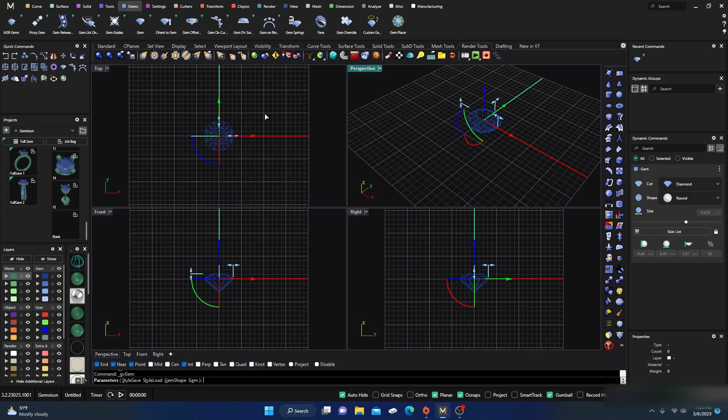So let's get started with this. First I'll go ahead and grab me a gem, and I'll just keep it at a 1 carat to make it easy for everything. Now what I'll do is take my gem and do my gem offset here, and I'll change it to yellow so I can see it a little bit better.

I'm just going to type in, I don't know, negative 0.03. Maybe that'll work. Negative 0.03 and enter. No, it's not going to do it. I wonder why. Okay, so I'll just drag it in. It says negative 0.3. There we go, negative 0.3, and I'll take that.

Right away I'll take that curve and drag it up to the top of my gemstone, so I know my prongs will go up around there. Okay, and I broke history. I should have - matter of fact, let's just go back so we don't break history. Let's take that curve. Since it's an offset, I should be able to go over here, and now I can move it up to wherever I want it, and I can keep my history, right? So we'll do that, and then - well, we're going to break it anyway.

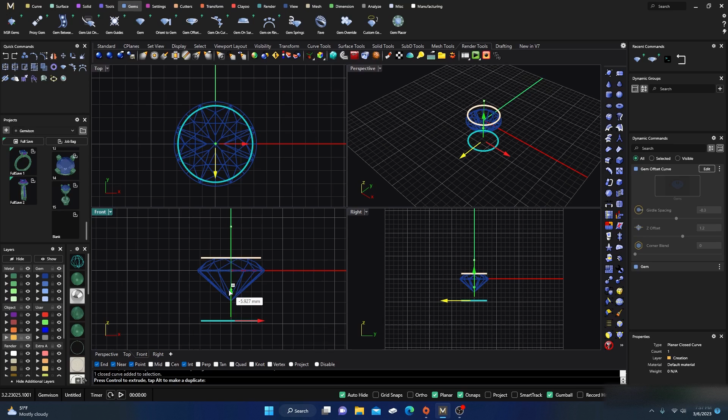So we'll go ahead and I'll hold down Alt, duplicate that, and drop it down kind of where I want the bottom of my head to be. Then I'm going to take that, hold down Shift, and bring it in a little bit so we don't want to see the prongs going around the outside there, or the head, right? We just want the prongs going in. So we'll take it something like that.

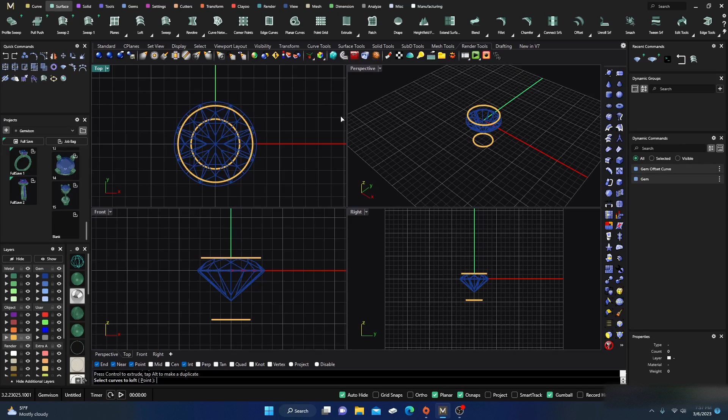And now we'll just do a loft real quick. This was a requested video, so hopefully it helps you. Then we'll hit enter, and we'll just take that surface there and turn that to a gray, and give it some shading. Okay, so there we go. There we have our head.

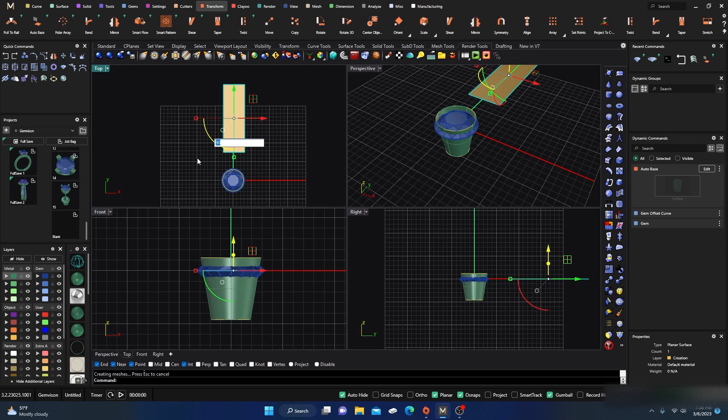Now let's go to transform, and we'll just do an auto base. And now everything's clicking, right? You know exactly what I'm going to do. So we'll go ahead and accept that. I'll take that and move it up around here somewhere, and then I will rotate that. Oh, it's already 90 - okay, 90 degrees. Change that to a little more friendly color. And then I'll just do my thing I like to do.

This time you probably should do it for reasons you'll see here in a second. We're going to dupe those edges and then hit enter, and then I'm just going to turn off that surface. Okay, and let's just get this to yellow.

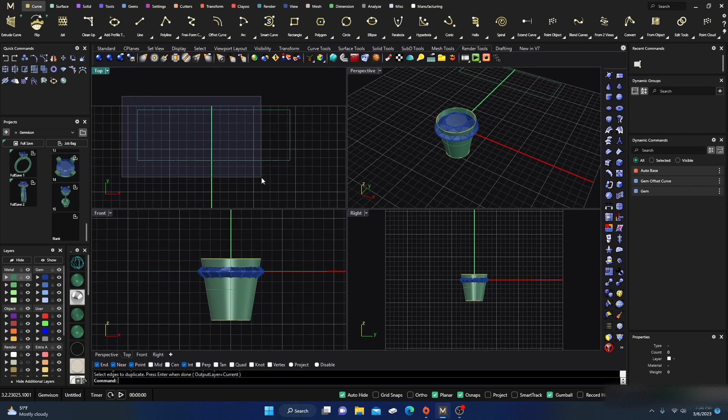Turn that to yellow, and we'll just change our layer to yellow. Actually, I'm going to change it to red because we're going to divide this curve. So I'm going to go up here and just type divide because I forget where it's at.

Divide curve by length of segments? No. Divide curve by number of segments? Yes, we'll take that. And 4 is what we want. So we'll go ahead and accept that and hit enter.

So there's my 4 prongs, right? This is half a prong. This is 1, 2, 3, and that's the other half, right? So now I'm going to take this curve and just hide it. I just want to see my dots out there.

Let's go ahead and go in here so we can get a good look, and we'll go to line curve, but I'll right click on it so I go to line both sides, and I will type in - now I'll turn it back to yellow. I'll type in, let's see, 0.5 will give me a 1 millimeter. We'll do 0.6 and hit enter.

So it'll be 1.2 in length. You can change that however you want it. I'll make sure my point snaps are on, and I'll go in here and click, okay, 0.6, enter, and that'll lock it in.

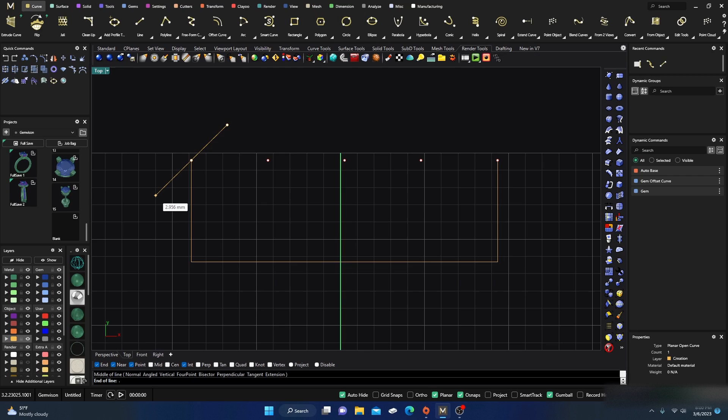So I'll just hold down shift and then click it, right? And then I'll take that and I will duplicate it from that center point there, there, there, and there. Okay, so now I have all my prongs. Those will be my prongs.

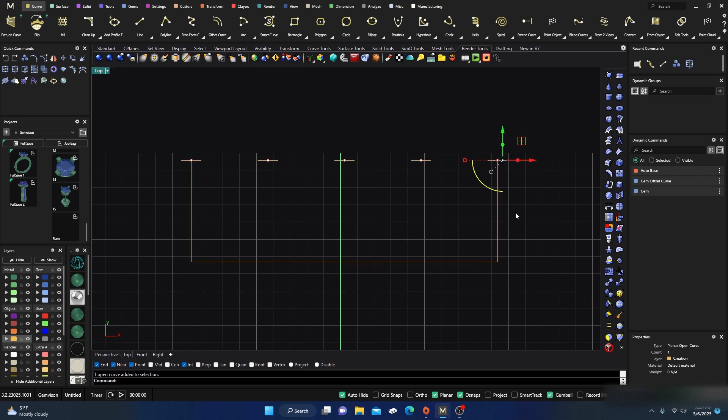So I'm going to take this one and split it with this line and hit enter, because we don't need this part here, right? Because we only need half a prong. So that's what we need right there.

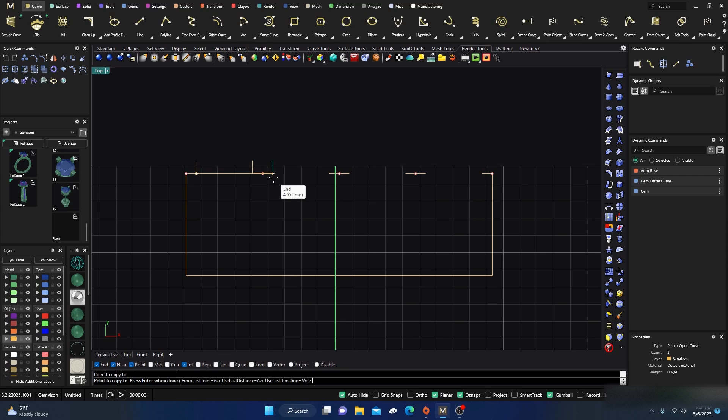Now what I'll do is go here and grab a line and snap to that end there, and kind of just hold down shift, draw it up, and then actually I'll just go ahead and take that and duplicate it from there, just to those ends of all those lines there. Okay, so now we have that.

Now we can do a blend. So let's do a blend from this one to this one, and let's flip those. All right, and let's drag them down quite a bit. I don't know, what was that one?

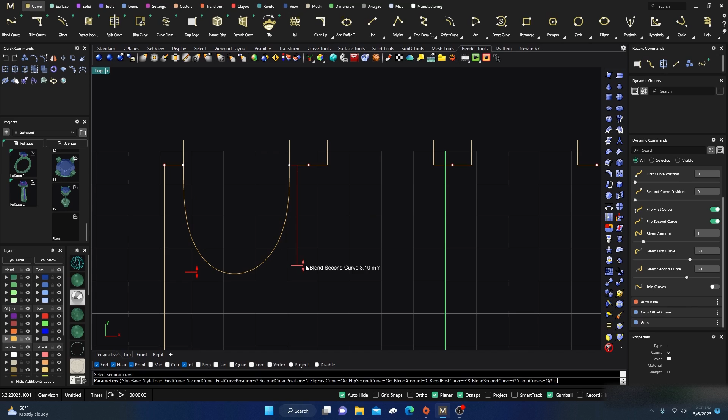3.3. You know, you can kind of play around with that, and we can always readjust it too. So, yeah, maybe that's okay. So we'll go ahead and take that.

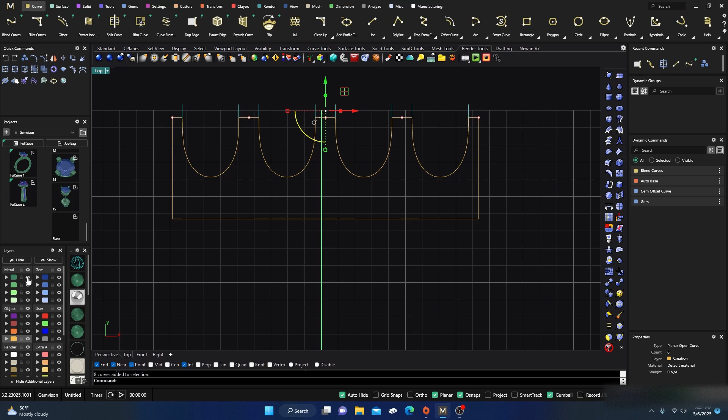And now I'll take this and I will do a duplicate from that point there and just snap them right along there. Okay, so now those will be my prongs going up, going around, right? So I'm going to take these lines here now because I don't need them anymore, and I'm going to change them to gray and turn them off.

So now I have all that, right? So what I'm going to do here is take all my yellow and I will join it all together. 12 curves joined into one closed curve.

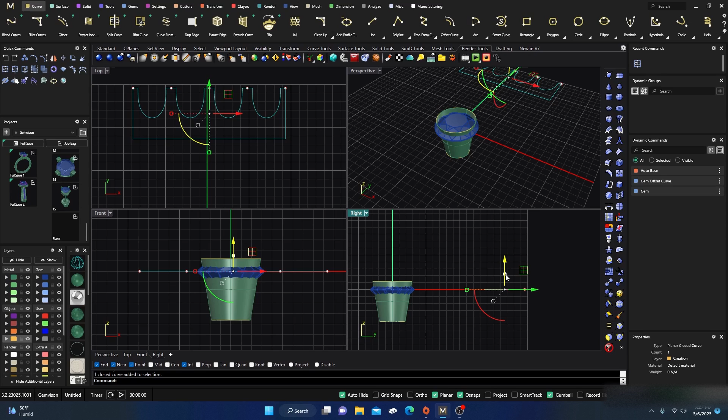Okay, so I'll take that curve, I'll go to my right view, and I'll click on the ball there for extrusion, and I will type in 1.2. It's already there, so click on it and hit enter. So there it is.

No, what was that? Okay, so I'll take this and I'll type in CAP, and there. Now we have a closed poly surface, or should, yeah. So there's our closed poly surface.

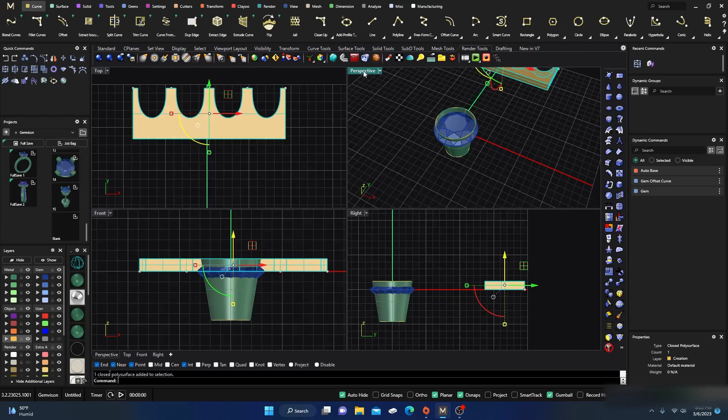Oh, I know what was going on last time. Okay, so actually we can take this, probably explode it, get rid of that there, and get rid of this here. Okay, and now we'll take all yellow again and join it together. Okay, so it should be all joined together. Okay, maybe we're good, excuse me.

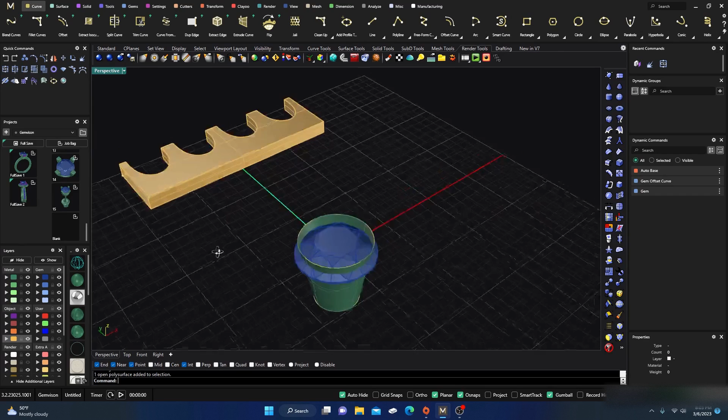All right, so we'll take this and turn it to a friendlier color here. And now we'll bring back our auto base, and we will go to transform. We will go to auto base. We will select our auto base. Oh, wrong one, sorry, my bad.

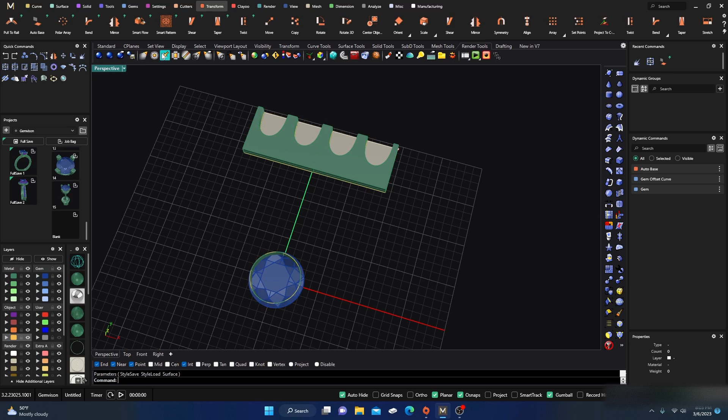Imagine that, we'll go to Smart Flow, select our first surface, our destination surface. We'll go over here, click Object, that'll be this, and hit Enter. And boom, it puts it upside down. Cool, and we'll flip that over and we'll drag it out. Right? So now we have it. And we'll just go ahead and take Enter.

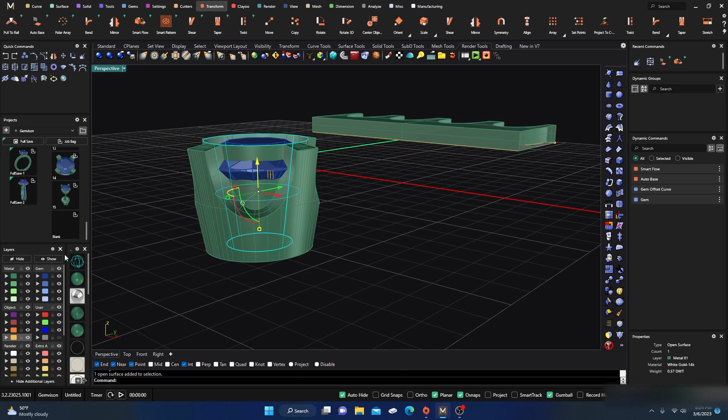And we'll take this surface and hide it. Now we have this, but you can see that in there, right? It's not too nice, so we'll hide that circle there.

No big deal, so we'll go in here and do a taper, and taper this bottom part here. We'll flip on and enable the second length handle, so we have both handles out here, right?

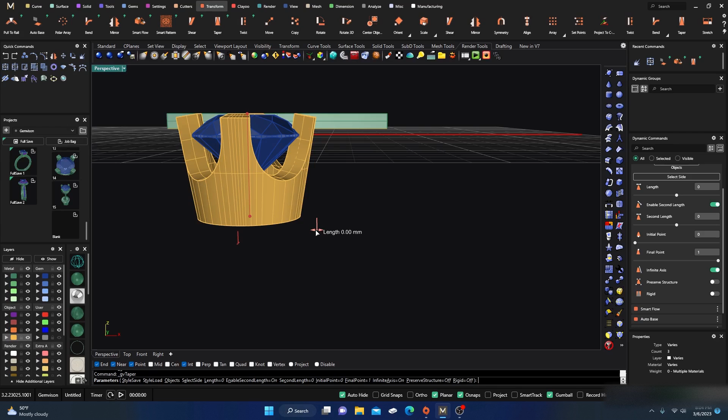And we'll take this one, drag it in, negative 1.3. We'll start there, negative 1.3. Take a look at it. Well, that looks okay, yeah.

All right, and there you go. There's your head for your... and it looks good, okay. So we'll take that and turn it to a friendlier color.

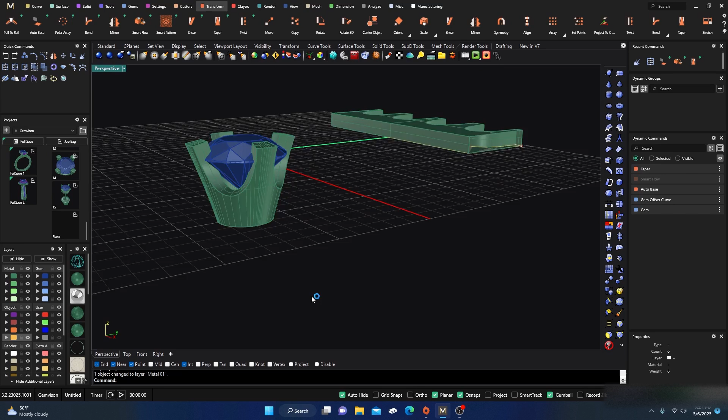The last thing you really need to do is check, make sure we got a closed poly surface. Something's going on here, so okay, let's find out where it's at.

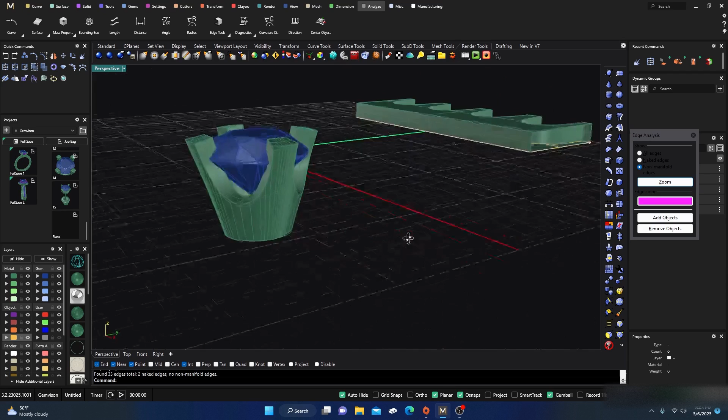We'll go to our analyze, we'll go to edge tools, we'll go to show naked edges. I'm sure it's manifold, yeah, okay, so we have it clicked on non-manifold over here. And where are you at?

Non-manifold, two naked edges. Okay, let's change it to naked edges, see where they're at. Right there. Are you serious? Okay, so let's go back to our edge tools.

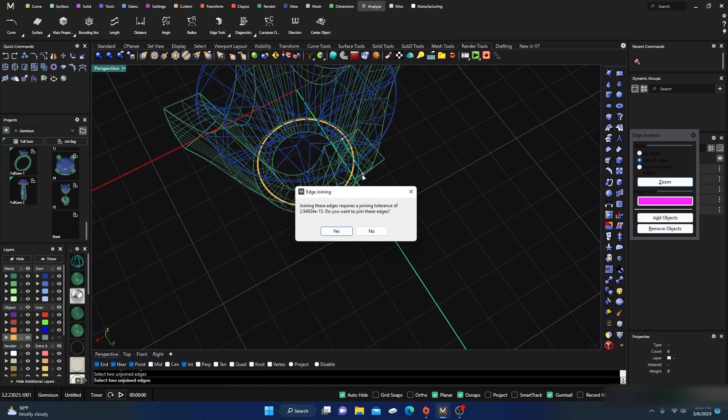Let's go ahead and join two naked edges. We'll take this one here, and this one here, and yes, okay. And we'll select our surface again, and now we have a closed poly surface. No big deal, right? Okay, so there we go. All right, that was easy to fix.

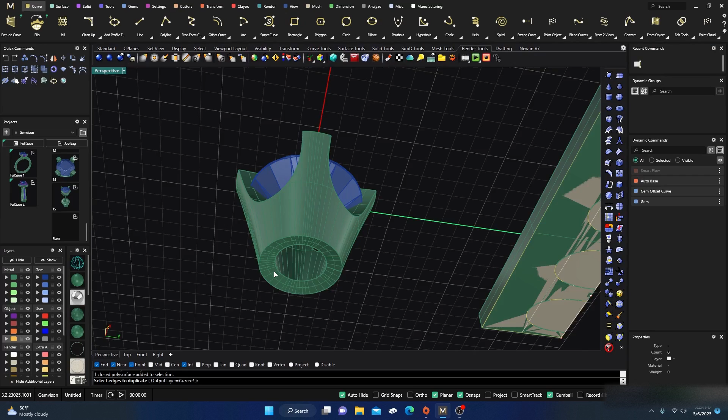And now let's do one more thing. We need to close up that bottom, right? So we'll go down here to from object, and we'll dupe edge, and we'll take this one right here, and we'll hit enter. And what color? We're on yellow, so we're good.

And we'll take that, and we will extrude it up, maybe about a 0.5 millimeter should be fine. So around there, and hit enter, and then we'll take that yellow surface, the extrusion, and we will cap it.

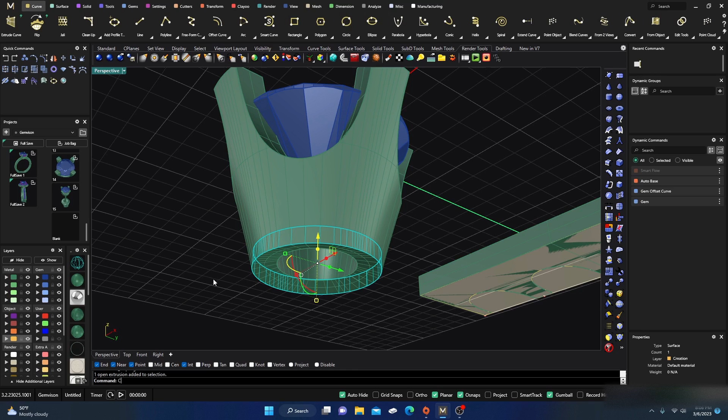Okay, so now this may or may not work, because you know how if they're on the same plane, sometimes it doesn't do it, but we'll try Boolean union. With this our first surface, enter, this our second surface, enter, and we are good to go.

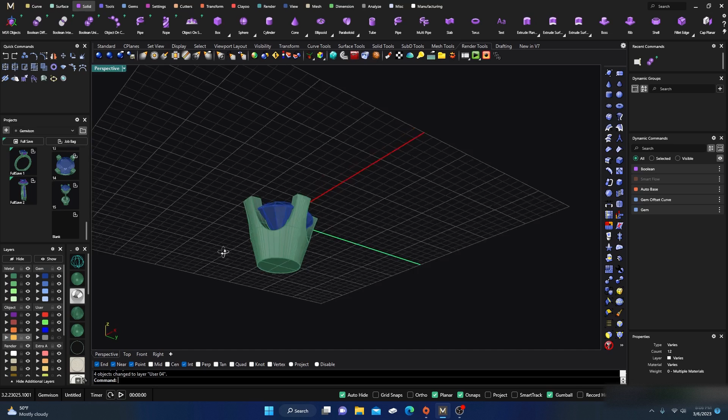We'll take that yellow, turn it to gray, and we have, oh, we have two. Oh, one, okay, this one we want to change to gray. Now we have this one that's closed, yeah, and we have a closed poly surface. So we have our 1 carat stud earring head there, right?

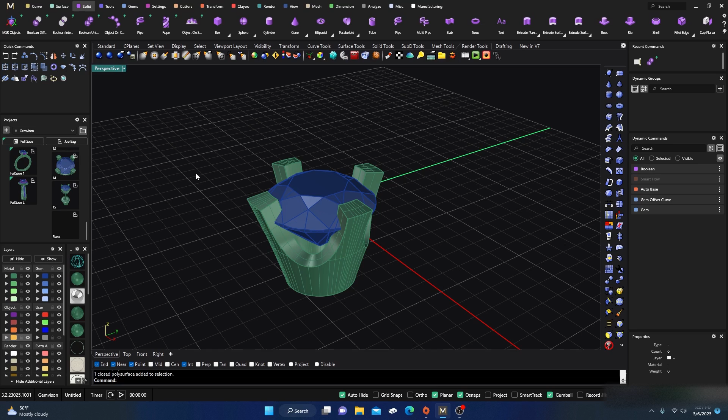Now you can drag those prongs out, make them a little bit thicker over there, or manipulate it more, drag that off the surface so it'll bring those prongs out. There's a lot you could do, if you don't want them cut that deep, you could probably even just go in here, hold down shift, and just bring it out a little bit so it's not cutting in there so deep.

But there's that. And from here, the only thing you need to do is right click on your, so get your collections, and you can get your earring post out there and import it.

Now this is something you do not want to print, either one of these. You want to order them from your findings facility. You don't want to cast these with your item.

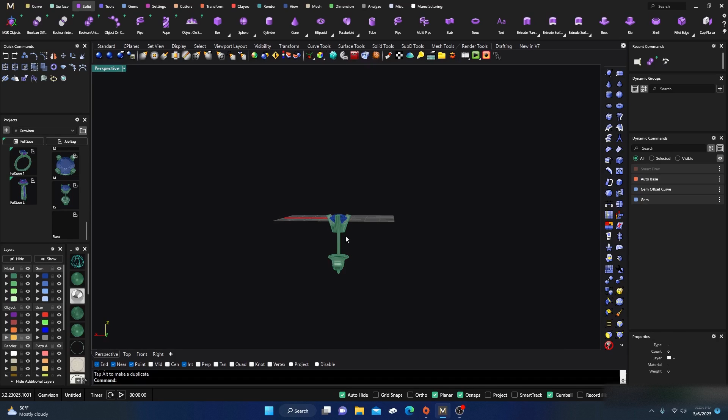Because the post is hardened, so it doesn't bend real easy, and this is all die struck and then bent around, or stamped, so that it keeps its spring.

But we'll shorten that post up a little bit. Where's it going on me? Okay, we'll take that, turn off snaps here. Oh, planar, okay, we'll turn off snaps.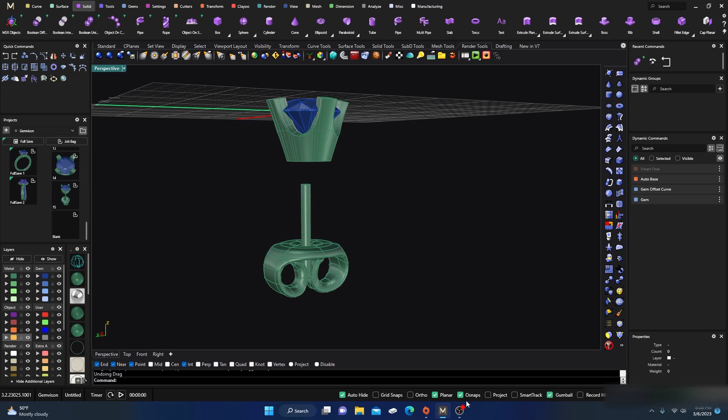We'll take this, drag it up a little bit. There we go. And we'll drag it into our ring or item. We'll take these two, kind of set it up in our center there. We'll take our gray and turn it off.

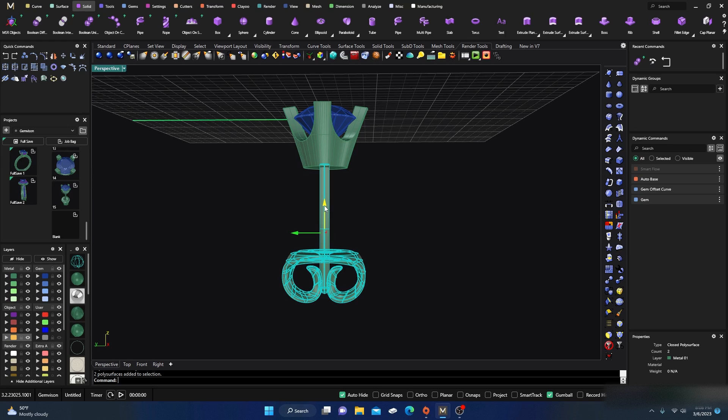And we'll take that and drag it up in there. And there you go. There's your earring. Really, the only thing is, if you want to, you can order these real cheap from your findings company, but that's how you make them, by the way.

All right, so there's that one. Pretty cool, huh? And if you turn it rendering, you've got a nice little earring going on. All right, so that's that. Let's go ahead and we'll just save this over here.

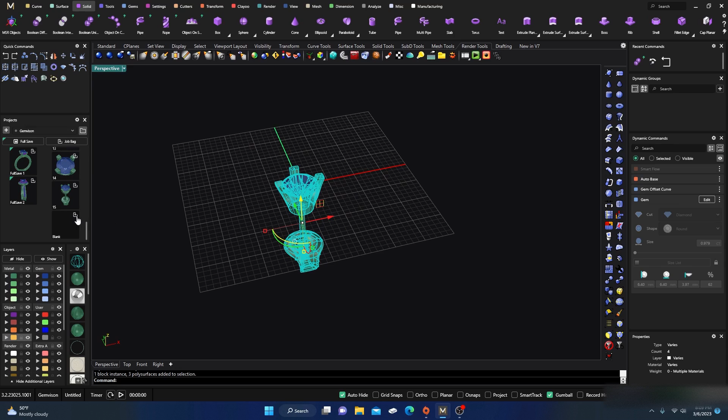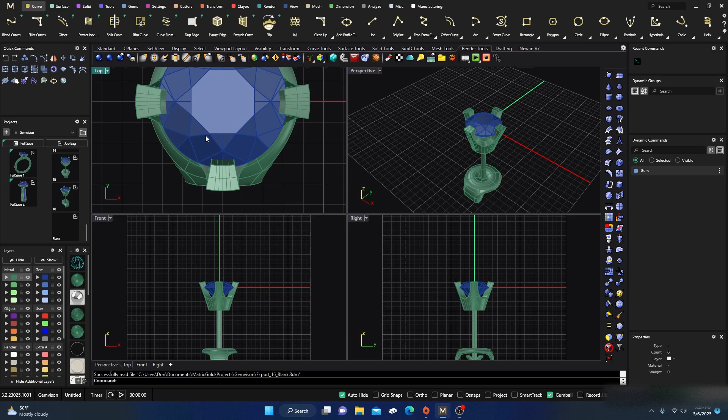As you can see, I already made it. I wanted to make sure I did it the best and easiest way for you. So let's go back in, because there's all kinds of ways to really make this. You could do a bezel and make cutters, but the prongs will be a little bit different. They won't be so squared off, I guess. Like this, nice and squared off. They would be a little bit different look, but those are things you can check out.

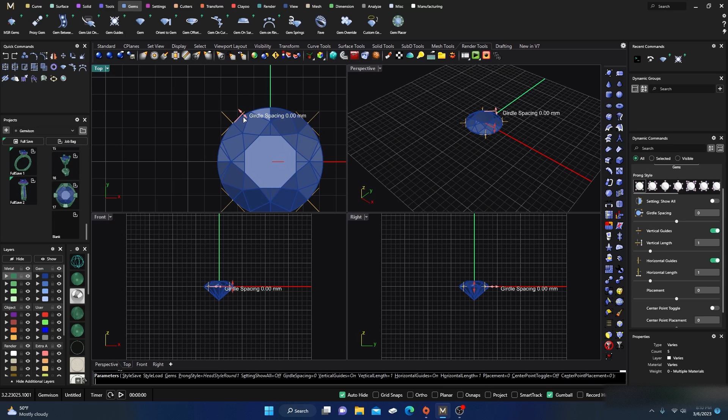But let's go ahead with the Martini earring because it's pretty cool. We'll just take the 1 carat. Martini earrings are really easy to make. We'll go ahead and click on our item here, or our gem guides, and I'll bump that out just a little bit. 0.2 should be fine.

And now in Matrix 3 they have a new command, center point toggle. We'll put that on, and we will go up here. Since it's going to be a Martini, we only want 3 prongs, so find the 3 prong here and click on that. So that'll just give us our 3 prongs there, right?

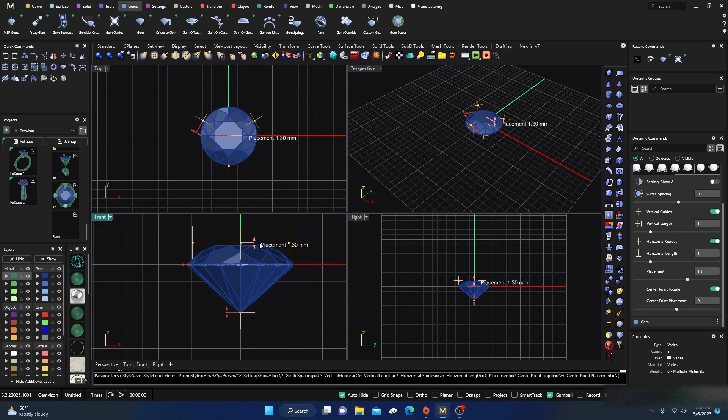And the last thing we want to do is drag those up a little, somewhere around here, should be fine. And then we want to drag this one down a little, and this is all parametric, so we can manipulate this as we go.

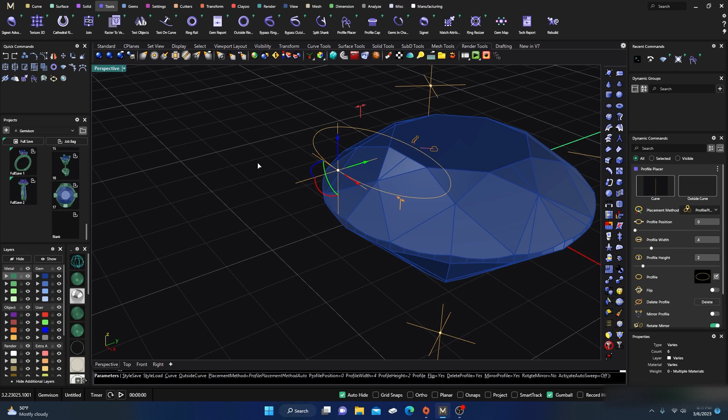So I'll accept that. All right, so now what I'll do is go to this one here, click on it, go to tools, go to my profile placer, and I have a profile out there. Now I saved this one so that it would be centered, so I think Momo kind of showed that in one of his videos, and I stole it. Sorry, Momo.

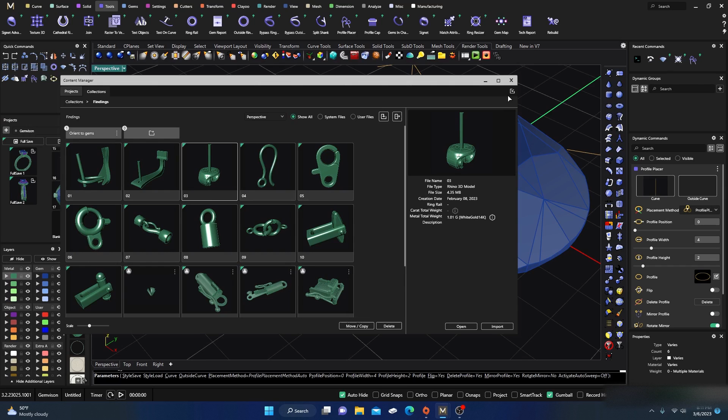So we'll go down here and find my one that's centered right there, hit select, and put that in there. And then we will take it to maybe a 1.2, and we'll take it to a 1.2 as well. There. So now we have a nice little round 1.2 prong there, and it's off about even with the table of our stone. So we'll just go ahead and hit that and take that.

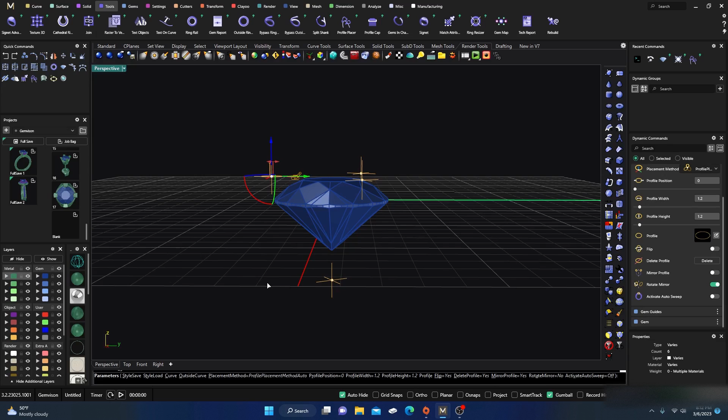And then I'm just going to go down here and do the exact same thing. Grab that, go to my profile library, find that centered one down in here, and select it. This time I'll do it from my command line over here, my dynamic commands, profile width. I'll click on it, type in 1.2, enter, and it automatically takes me to my height. So all I have to do is type in 1.2 and enter again, and now I have that exact same width, and I'll hit enter.

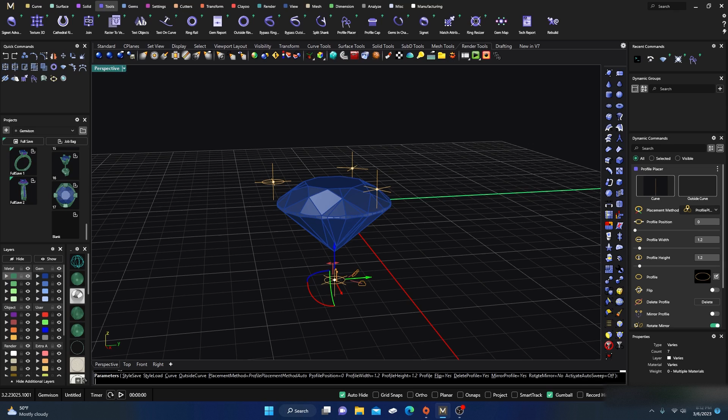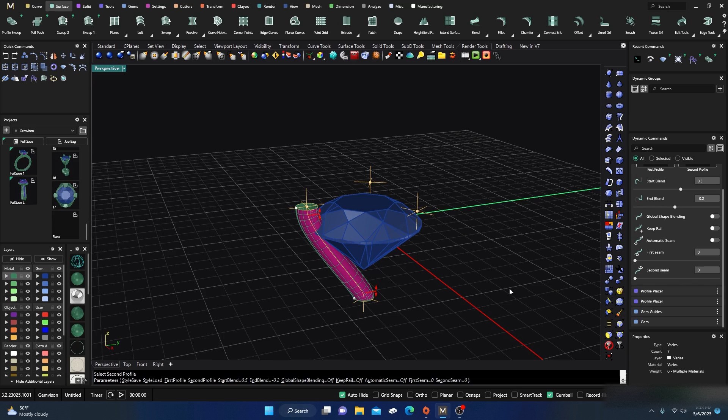Okay, now here what we'll do is go to surface and we'll just do a profile sweep. We'll select that one and select that one there, and it throws a profile out there, and it's a little jacked up. So let's see, we want to bring this one up, and I think I'll go ahead and turn off my automatic seam. Yeah, that's much better. And then you can manipulate this however you want, kind of drag it down a little bit, something like that, to get it to wherever you think you want it at. So we'll do something like this and hit enter.

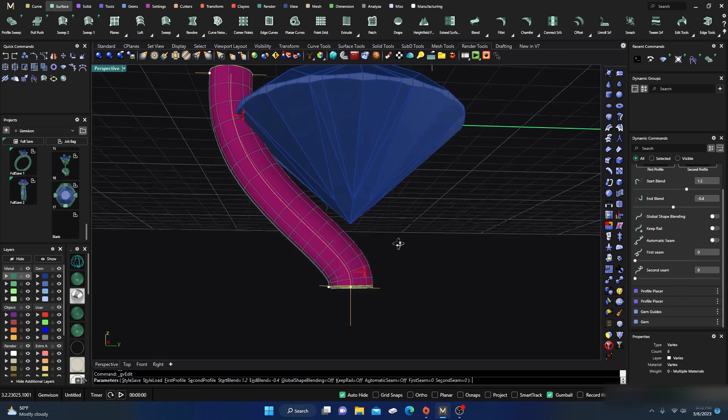Now, that's a little messy in there, so we're going to go back to that sweep and drag this one up so we get a nice little curve going in there. All right, there we go. And I'll hit enter, and now it's parametric, so we can go back here, right? And we can drag that down and it follows it. So that's cool. And we'll take that.

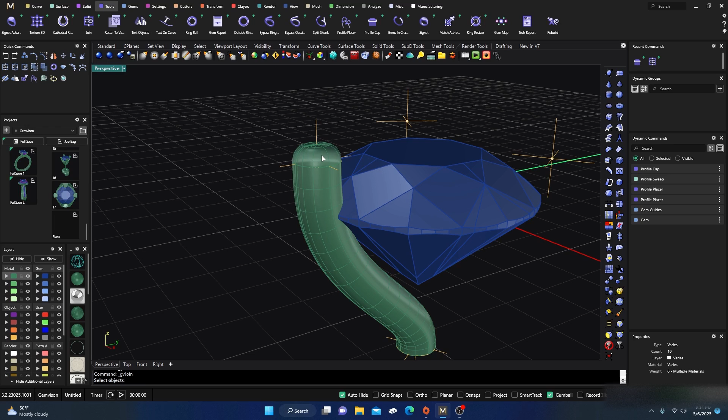All right, now I'll select this curve, go to my tools, and put a cap on it, giving it some roundness. Something like that. Now I'll stay in my tools and go to dynamic join, select this one, and hit enter, so that it's all parametric still.

And this one down here, I think cap will break history. Let's see... CAP. Yeah, it broke history. Do I want to break history? Let's go back and try to keep history good.

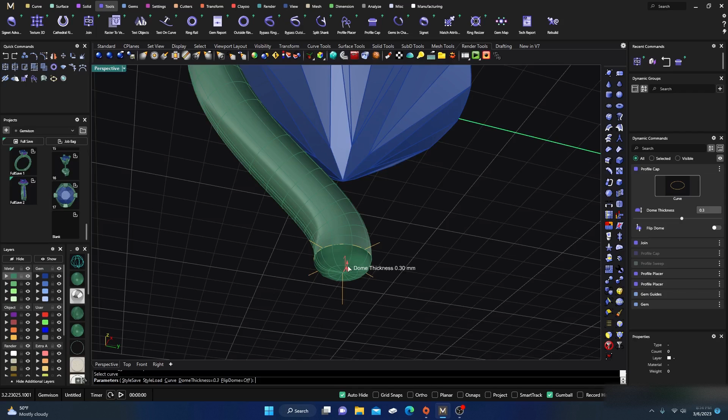So let's take this, well if I do that it won't—oh, it's parametric. Okay, so we'll select our curve, this one here, take it to zero and hit enter. Is it joined? No. Okay, so we'll go back to our parametric join and join those, hit enter. So it's still parametric, and I can go back in here and move that around, right?

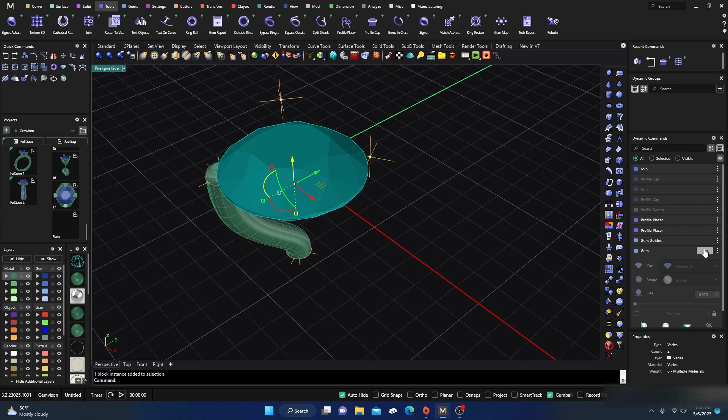Okay. And maybe—I think this is parametric too—so if I want to change my gemstone, yeah, cool. How cool is that? Okay, we'll just take that anyway and hit enter.

And then we need to flow those over onto there, right? So let's go to our tools. Yeah, this isn't going to be parametric for long, though. I don't think. Rotate—yeah, it's not parametric.

I can't do mirror because mirror will—I'll show you. If I hit mirror and then hit my X, it just puts it on the opposite side. If I put my Z, that's going to put it way on the bottom there. If I do multi, it's not going to do anything. So that's really not going to be the command we're looking for, unfortunately.

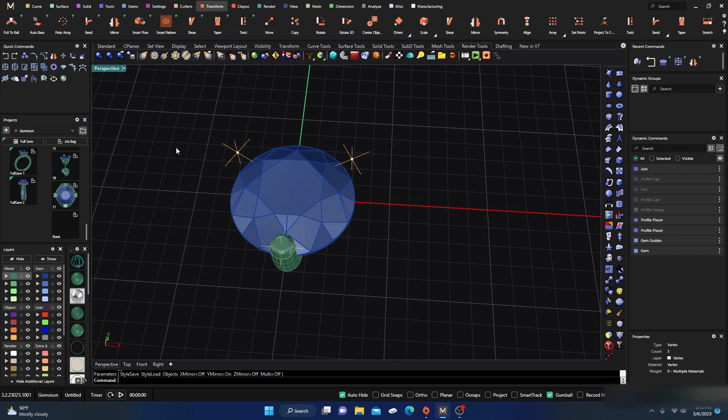So yeah, there's nothing parametric that'll work for us, I don't think. Oh, polar array—there we go. Okay, select our objects, we'll take this one here and hit enter. Whoa, that's not too cool, huh?

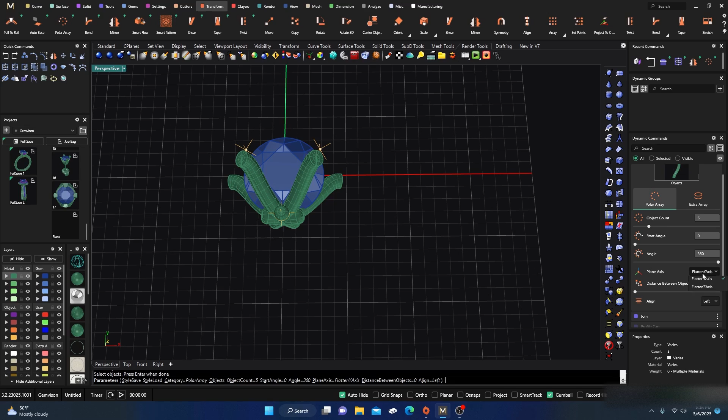So let's go over here to our dynamic commands. Which one—array, extra array. Okay, which one is it? I forget. Flat. X-axis? No. Z-axis? Yeah, but that's not—oh, I know.

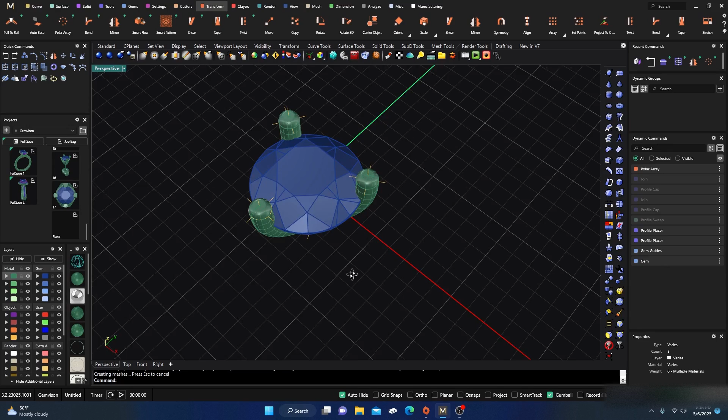Number of counts, only 3. There we go. Yes! Cool. All right, I don't use that command very often, but as you can see, it works fine, and everything, I believe, is still parametric.

Yeah, so we can change it to whatever size we want, and it'll update. And you can go back and change the depth of this if you want.

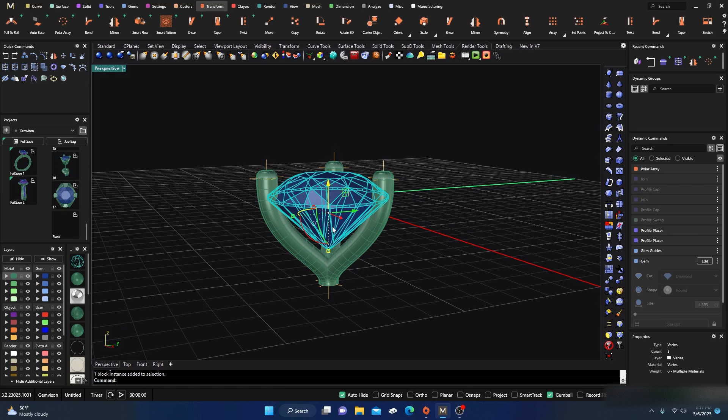So the last thing we want to do is grab our stone, go into settings, and put an under bezel on that. And let's see, I don't know—I'll take this one, this one looks kind of cool. We'll hit enter, and we'll drag that in some, and drag it up.

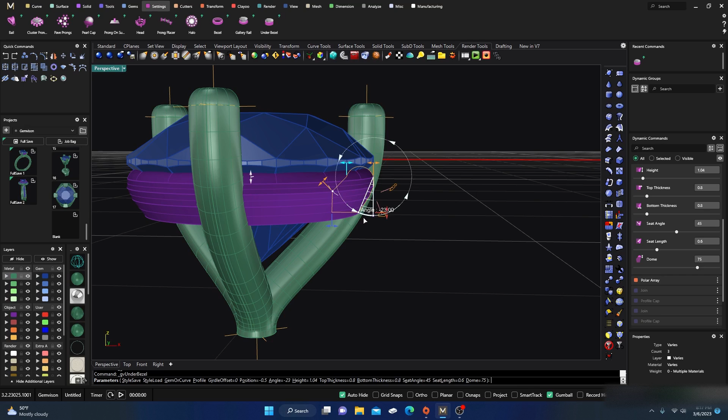It doesn't need to be a 1.5, something like that perhaps. We'll take that outside and just bring it in a little bit as well, something like that. Let's hide our gemstone for a second. Yeah, that's okay. 0.8, that should be fine. We'll take something like that.

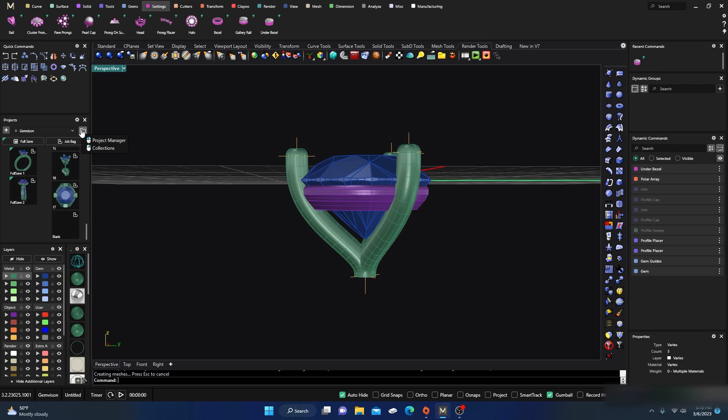So we have our Martini earring now, right? All we have to do now is go back to our collections, right click, and bring back up those earring parts, findings, and we'll take that, and we have it. We'll drag it down and line it up to our Martini earring there.

Yeah, something like that. And there you have a nice little—again, you could probably shorten that a little bit and drag it all up in there. Again, you do not want to do the posts. And there you go—all you have to do is do the booleans, and you have a nice little Martini earring. Something like that. Pretty cool, huh?

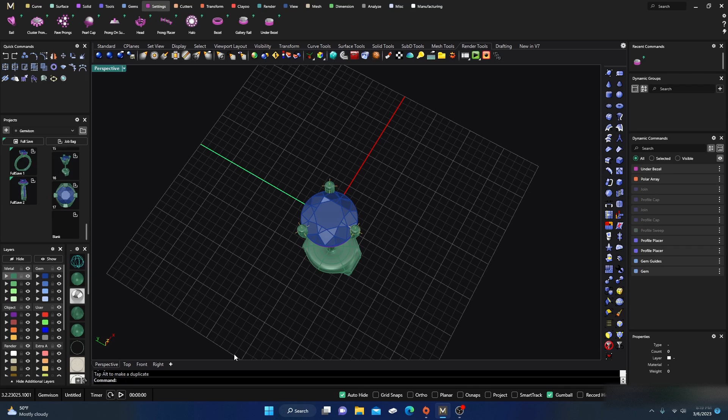So those are two. I don't know, how long are we on here so far? I should have put a timer on. I'll go ahead and stop there. If you want to see the basket type style, let me know, and I can go ahead and throw that up.